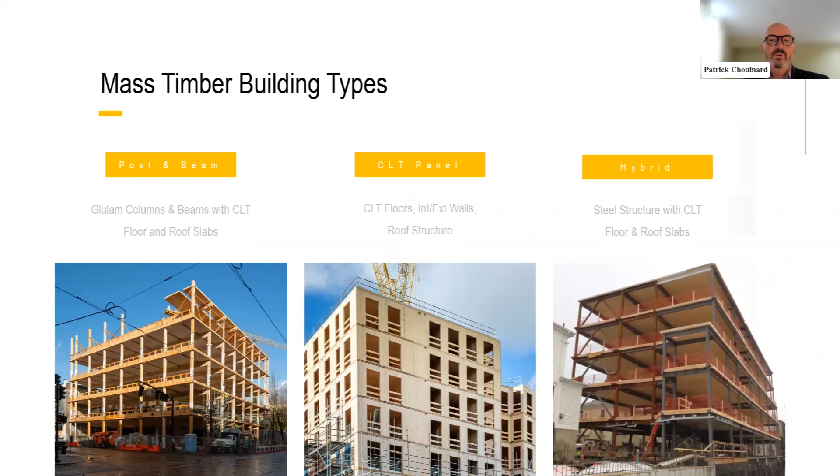Mass timber elements are varied, and there are a number of elements available in the marketplace today. CLT stands for cross-laminated timber panels. These are massive wooden panels. In our case, we make one that's 11.5 feet wide, 53 feet in length, and about 15 inches in thickness.

They are considered an environmentally friendly alternative to concrete, and they're structural panels. Then there's glulam, which is used for columns and beams.

Followed by NLT, which is nailed laminated timber panels. These are panels made up of dimensional materials, 2x4s, 6, 8, 10, and 12s that are nailed together to create panels. Then there's DLT, which is doweled laminated timber, the same as NLT, but instead of nails, they use dowels to fasten the dimensional materials together.

Then there's MPP, which is mass plywood panels. This is plywood panels on steroids—the same as plywood, except much thicker and much larger.

Then there's clips, which stands for cross-laminated insulated panels. These are prefabricated panels that come from the factory, and they're used to quickly enclose the outside of a building.

Then there are box panels, which are CLT panels essentially, but hollow on the inside. They allow us to span greater distances than a typical solid CLT panel, but cost effectively against concrete and steel.

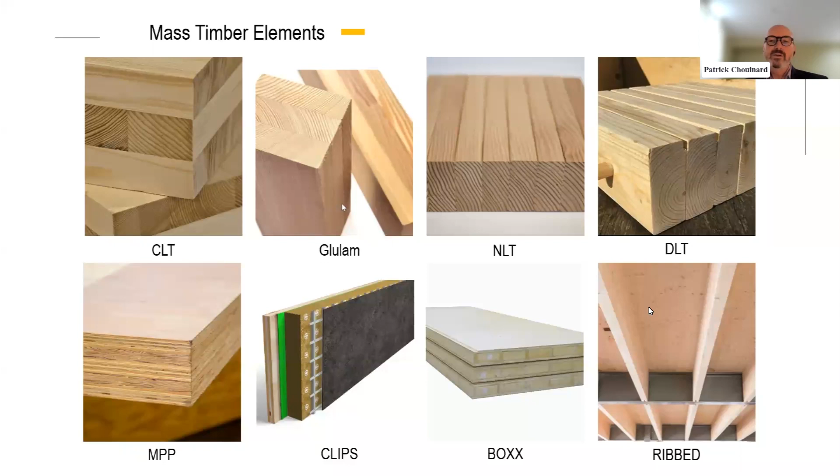And then we have rib panels, which are just like a box panel, except there's CLT on the upper surface, exposing the joists below.

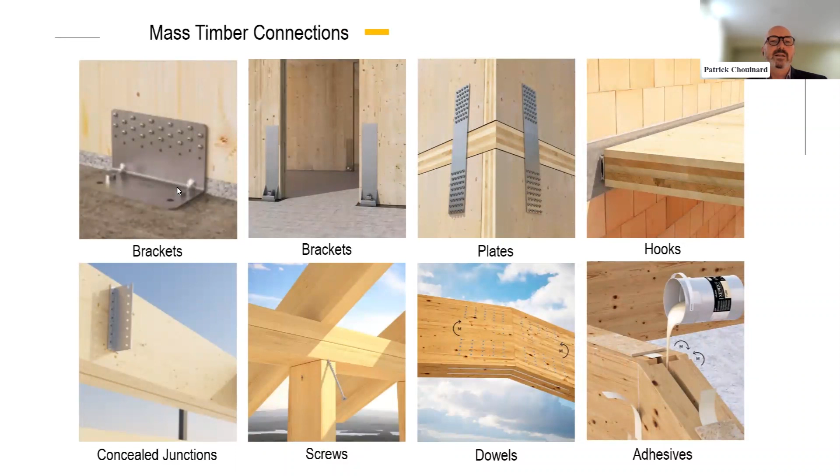The connections in mass timber buildings are really quite simple. It's made up of engineered brackets, plates, hooks, concealed junctions, screws, dowels, and adhesives. So the buildings go together very quickly.

Mass timber in Ontario: we're in the midst of a revolution in the construction industry that began in Europe about 35 years ago, landed on the shores of British Columbia, and now has made its way across Canada as well as into the United States.

It's characterized by buildings that are being prefabricated in high-tech manufacturing facilities and shipped to site where they are assembled rather than constructed in the traditional sense.

Mass timber is happening in Ontario in a big way, and this is a selection of some of the larger projects that are currently under construction, recently completed, or currently under construction in Ontario.

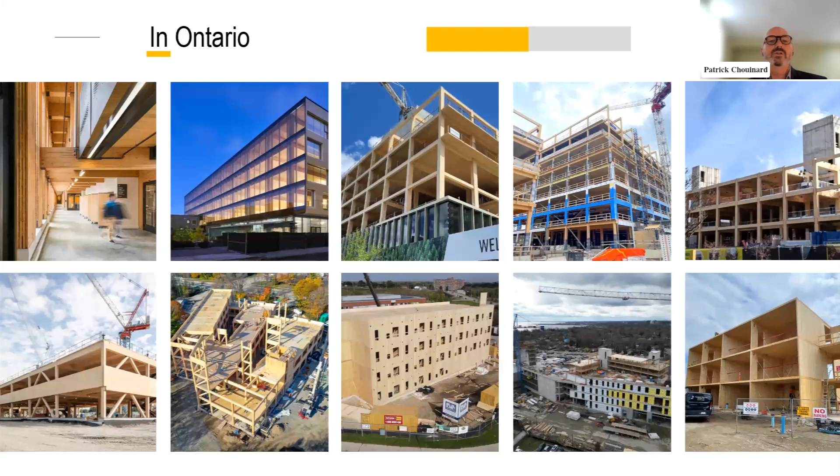Element 5 was founded in 2015, and we've done approximately 80 projects to date. I've listed all of these here just to give you a sense of where mass timber is used, in what industry sector and in what building typology.

So we have a fire hall here, top left-hand corner. This is a 3-story hybrid office building, a steel building using NLT roof panels. The next one is an extension to a library at Wilfrid Laurier University. The next one is an Aboriginal healthcare center in London. Then we have a boaters pavilion in Orillia. Bottom left-hand corner, an office building in Quebec.

We've done quite a number of single-family homes and cottages, and then everything from there up to the next project, which is our largest project: an 80,000 square foot office building for the Toronto and Region Conservation Authority.

Recently we've been doing quite a lot in affordable housing. The first one, second from the right on the bottom, is an affordable housing project for the YWCA in Kitchener, which Matt will talk about. The next one is a bit of a hybrid - also affordable housing. It uses CLT for the floor slab, but light wood frame interior and exterior walls. Lots of new projects we were under contract to supply in 2023 and beyond.

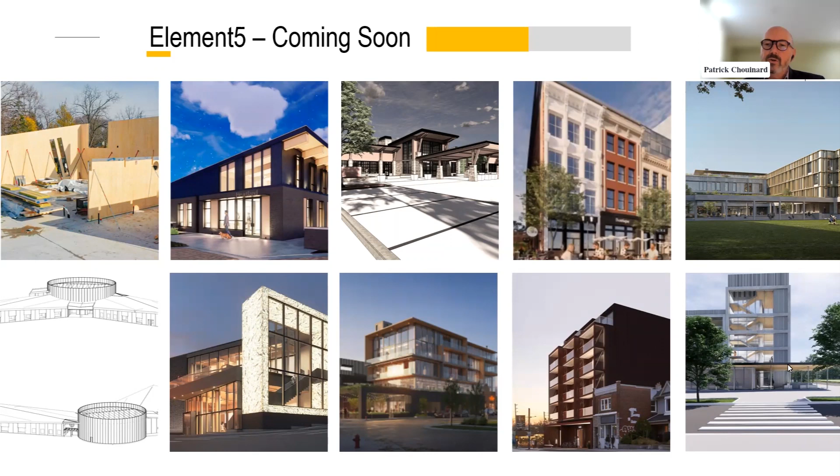Here we have, top left-hand corner, a daycare center in St. Thomas. This is a veterinarian clinic in Michigan. The next one is a golf club house, also in Michigan. We have a mixed-use building in Hamilton, a student residence for the University of Toronto. Then we have an Aboriginal school in Northern Ontario, a photo museum in Cincinnati, two more mid-rise multi-use residential buildings, and the last one here is we just got a contract for this little portico on the outside of a university building in the United States.

So why mass timber? The building you see here is called Ascent. It's the tallest mass timber structure in the world, in Milwaukee - a 25-story building. It has 17 stories of post and beam with CLT floor slabs above 8 stories of concrete.

This little graphic I've taken right off the developer's website shows the reasons why they used mass timber and the result of actually building this way. The first reason is it's a renewable resource. In this case, there was 90% less traffic on the job site, it required 75% fewer on-site workers, and it was built in 25% less time.

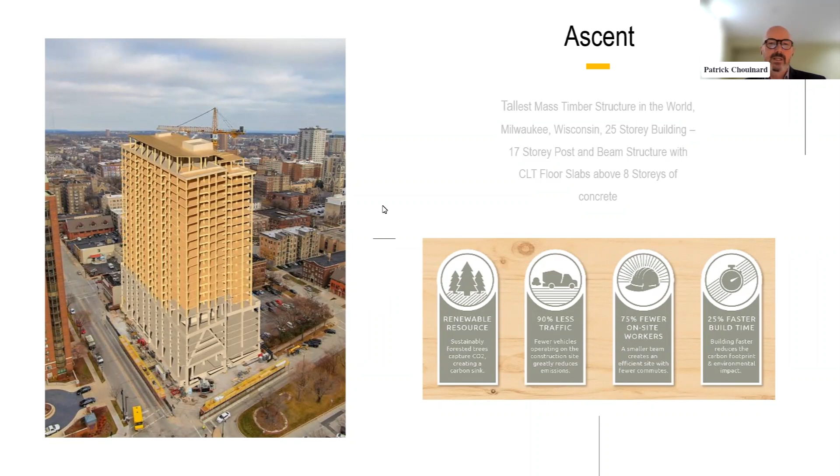From the environmental perspective, there's a major push to build in mass timber for environmental reasons. The concrete and steel industries are responsible for somewhere between 12 and 14% of the carbon dioxide in the world today. World population is growing from 7 to 9 billion over the next 35 years, and we know we cannot continue to build the way we've been building for the last 100 years. When building with wood, we're leveraging our forest's natural ability to absorb carbon - finding a systematic way of not only removing carbon dioxide from the atmosphere, but storing it in the form of these beautiful buildings.

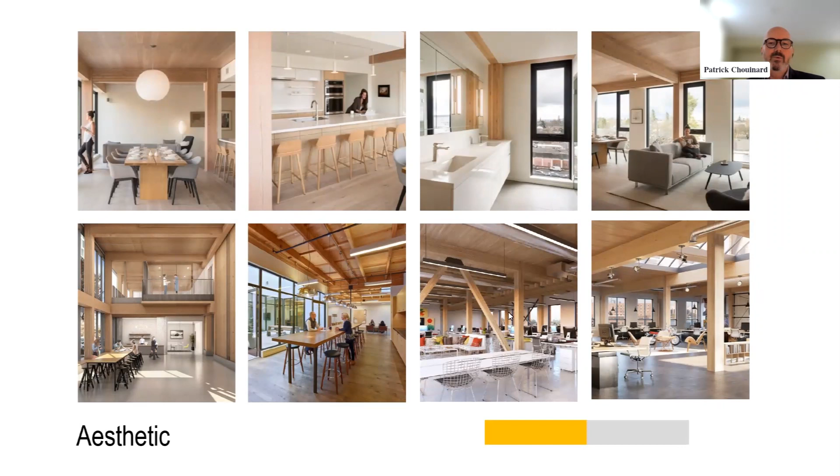There's also an incentive to use mass timber for the aesthetic. Many of these buildings are considered quite lovely on the inside. The upper row are the interior of residential spaces, the bottom row are the interior of commercial spaces. And then there are the health and wellness benefits. Many biophilic research studies have shown there are health benefits associated with living, working, and educating our children in environments where occupants are exposed to natural elements. As humans, we are just naturally connected to these types of spaces.

We were asked to address the issues around mass timber, and the first question that always comes up is how much it costs, so I thought I'd address that right away. A number of studies have been done looking at cost comparisons between mass timber, steel, and concrete. This is one particular study completed in July 2021 that looked not only at the cost differences between mass timber, steel, and concrete, but also at the global warming potential - essentially the impact on the environment.

I say this is true of pretty much every study. The results are always about the same. Essentially what they're saying is mass timber costs the same as concrete and steel, but if you can build in wood for the same price with less negative impact on the environment, why not build in mass timber?

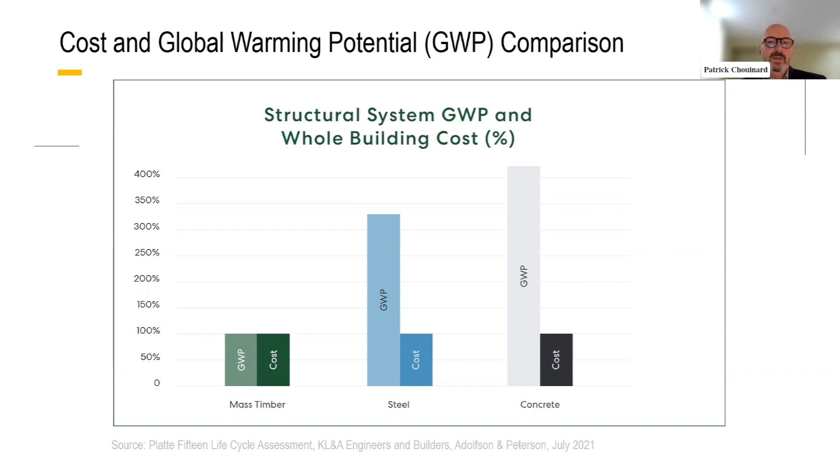So with that, I'm going to turn it over to Matt Boland, with whom Element 5 has worked on quite a number of projects together. So, Matt.

Thanks, Patrick. Yeah, very grateful to be here. Not so grateful about the birthday shout out, but I guess I'll carry on.

This, picking up where Patrick left off, mass timber for myself professionally has been an interest of mine for about 20 years. I was aware of it 15 years after the European invention or proliferation over there, definitely on my radar. And specifically, Edge Architects and our group for the last 7 years have been really in tune and focused on mass timber and how we can design with it and actually get it executed on built construction projects.

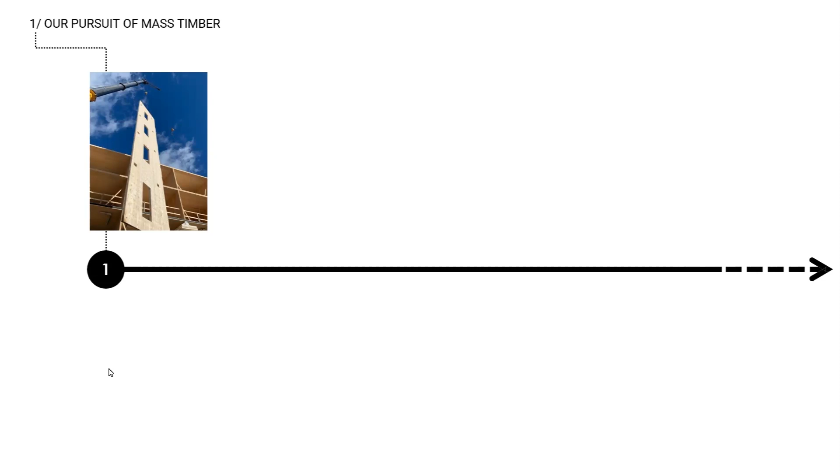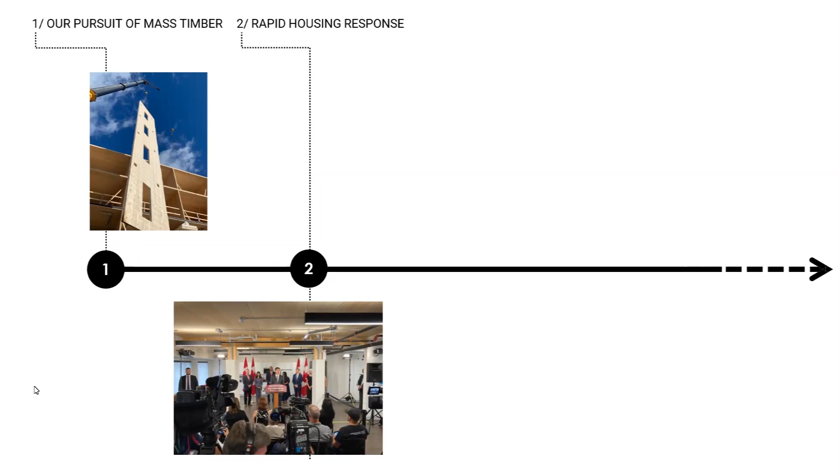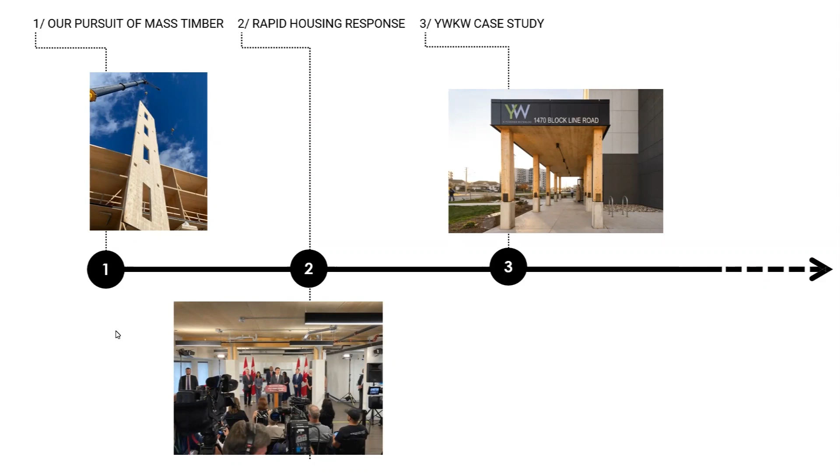So today, in a quick way, I want to go through our firm's pursuit of executing mass timber. Next, I want to talk about a rapid housing response. I know this group has more of an ICI focus, but understanding the marketplace right now and the dramatic need for housing, that's what's pushing a lot of the construction industry generally. That's what we're seeing, even though our work covers a pretty broad range across all different sectors - housing and a rapid housing response ended up being our ticket to realizing mass timber. Next, I'll go to that first project that was part of that rapid housing response, the affordable housing project for YWCA that Patrick mentioned. And finally, I'll talk about some future directions for us and the industry as we see it.

So what I want to start with is keying in on some projects where we made our attempt to incorporate mass timber, where we thought we had a client group and an overall building team interested in the innovation and in trying to analyze and assess what could best meet the needs of the project. These represent 3 projects in our firm's history and portfolio, and I'm just going to cover these relatively quickly.

Sorry Patrick, can we go back one? The first was a mid-rise infill building. As a lot of us know, with that missing middle typology, understanding the most efficient way to build it is really challenging. So we went through that exercise - mass timber was one of the final candidates we chose as our structure, but ultimately due to market and supply back in 2017, we weren't quite there in terms of the client's comfort, and ended up getting pricing on a hybrid Hambro style concrete and steel system that worked.

The next project, the glove box, started out on a smaller site, and we had this idea for reinterpreting brick and beam office in a contemporary way using mass timber, with all the efficiencies of Class A office demands that we had. Instead, the project scale and scope grew, which was ultimately a good thing, incorporating a heritage building. Given the gymnastics needed and the appropriateness of using mass timber with the reinforcement that had to be done on the existing heritage structure, it just made more sense to go cast in place at that time on that project.

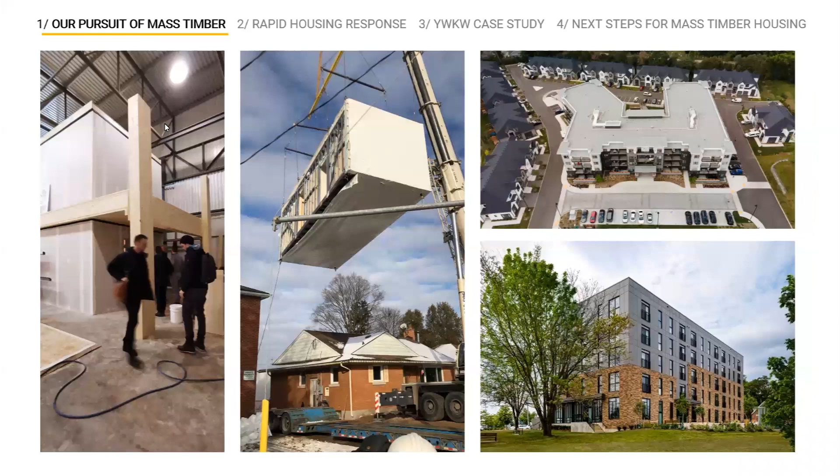Before the next slide—a lot of that work and collaboration we did, studies in not just conventional models, as you can see on the right side, for multi-res development, but our work in the modular, volumetric modular, and then the work I just discussed on the wooden office building project, ultimately led us to the YWCA, or the local branch, YWKW Transitional Housing.

This project was based on the Rapid Housing Funding Initiative, which had a very, very tight timeline and also required some degree of modular construction, what they defined as modular construction. Although that means different things to different folks, it was ultimately defined through the program as having some level of offsite prefabrication that was assembled on site.

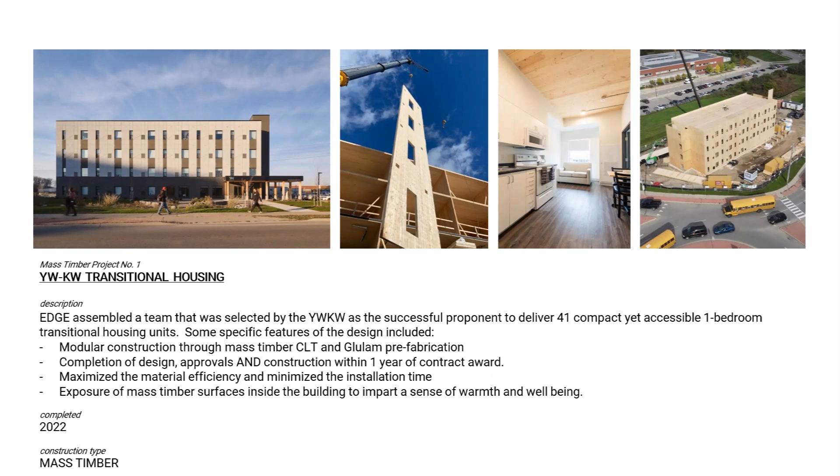So obviously that worked for us on this project. In addition to the modular requirement, the specific timing around round 1 of the funding was actually a 12-month window for completion, from the time of contract sign to actual occupancy—which for most of us, and I'm sure there's a lot of eye-rolling on this call, especially with the knowledge base here in terms of the ability to get through approvals, through design, through tendering, through construction...

...that was a pretty monumental ask at the time. But through a very specific design-build response, where we brought all of our trades, all of our consultants into the fold, and we were also ready for it a little bit early because we knew of the program and some of its objectives, we were actually able to do this successfully on phase 1.

As I'm going to get to in some of our next steps and future directions, we've actually been able to utilize that same approach, that same team, and mass timber as our primary structural resource on rounds 2 and round 3 of the funding—round 3, which is active and currently on our plates right now.

When it comes to the fast track process and more importantly, the team, this is just a quick diagram that I want to walk through in terms of the CMHC and that RHI funding, which you can see up in the top right corner. Knowing that was going to be coming down, and knowing that we had that network of folks who were interested and tracking it, we ended up with Element 5, and on the back of the relationship we had on our wooden office building project, we started conversations about how we could come up with a solution.

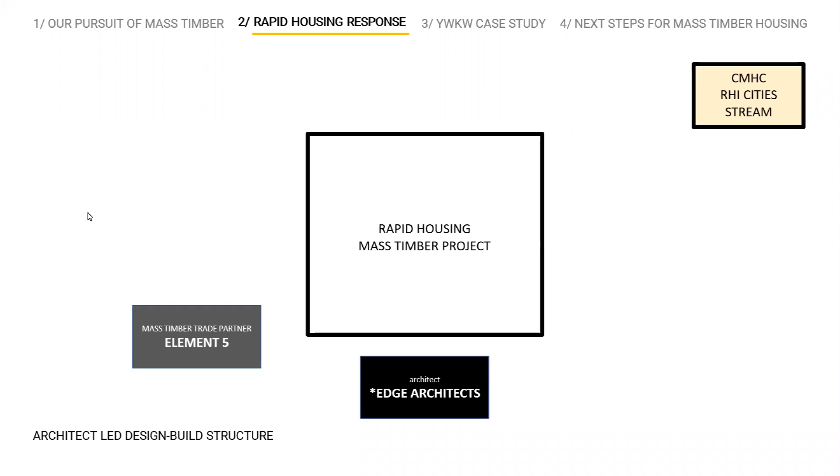A solution that would be suitable to the needs of these types of users—non-for-profits, supportive and affordable housing providers—and that would be efficient. And what kind of team would that look like? So from there, we ended up putting together that team.

As you can see, specifically on the right-hand side here, the trades and consultants were so critical to getting involved early, and then also ultimately the general contractor who we really needed. We as architects and holders of a certificate of practice cannot be constructors, so we knew that with the conventional CCDC 14 that a lot of these groups were going to be relying on for that turnkey approach and fast track approach for the clients, we would need a solid and reputable contractor to take that on and work closely with.

So we had worked on a number of projects with YWKW, and they became a really great partner along with ourselves, Element 5, and the rest of our trades and consultants to work that through.

Another key part of this is, as you can see here, the CMHC funding came through our two-tiered form of government, municipal government in Region Waterloo. That funding came directly to the region, and then the region actually administered that funding to YW.

And on top of that, we had the city of Kitchener on the left, who actually offered up the land, which was underutilized vacant land, city-owned.

So that in and of itself created a collaboration and an aligned motivation for everyone in the team, even at the approvals phase of the project, that really paid a lot of dividends in terms of that fast tracking process.

And then, as is often the case, we also had a construction advisor, a consultant, client rep in WalterFedy, who was another local reputable multidisciplinary firm, who was again essentially part of the team and part of that collaborative effort that we worked on.

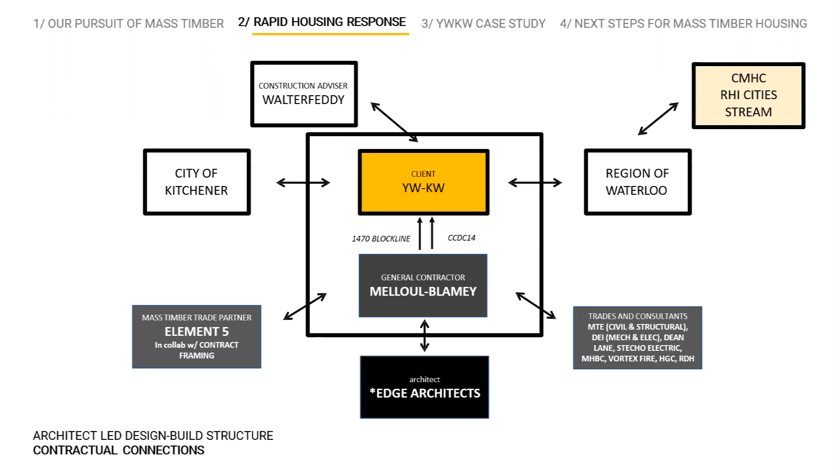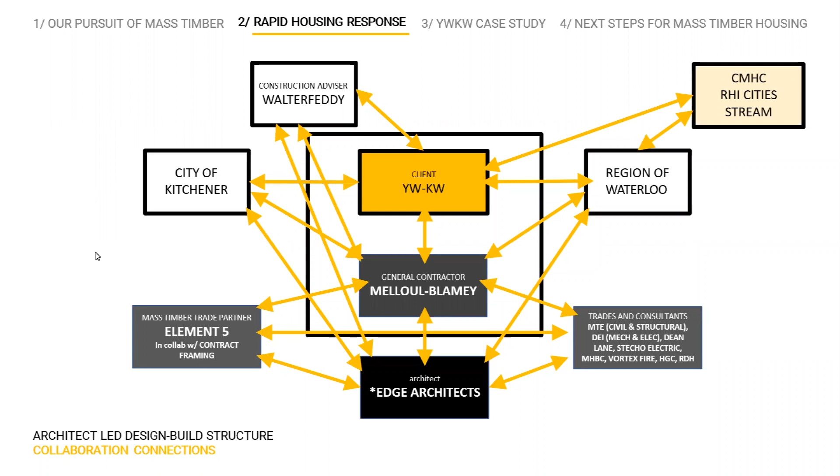So as you can see, the degree of collaboration and communication required through the project was extensive and ultimately led to a lot of our success.

Here is something we created in the early stages of the project that just, again, was going to put that focus on what are the different stages and what are the different targets that we need to map out here and have everybody on the team understand.

So obviously first was working through that planning and approvals process. In this case, utilizing the mass timber, it was actually something that we needed to integrate not just the planning department, but actually the building department too, and getting their comfort.

And in doing so, what we ended up doing is pulling on Vortex as our fire and building code consultant. We were able to not just utilize their knowledge and their understanding, but again, their network of other projects.

So although this was one of the first multi-res fully mass timber projects constructed in the province and in the country that we're aware of, in this type of fast track approach specifically, there was some other projects, one particular in Toronto that Vortex had also worked for.

So there was already a basis of understanding with the Toronto Building Department and an alternative solution that was provided to them. And we were able to connect with them, start to open up that dialogue and exchange of information. In fact, not just between us and our consultant and our design and client teams, but we were actually able to connect the actual building departments and the chief building officials to start to foster that. And that's something that really helped us through that stage as well.

And we've continued to utilize that in other jurisdictions, making those connections.

Outside of that, you can see from our site approach and foundation design, it was very much based on a simplistic approach, as most of us know. If you start to get into very complicated underground parking structures and various things like that, you can really suck up a lot of the time of a project underground before you even get above. And so that was a bit of a challenge in terms of making sure the design was very efficient and streamlined from that standpoint.

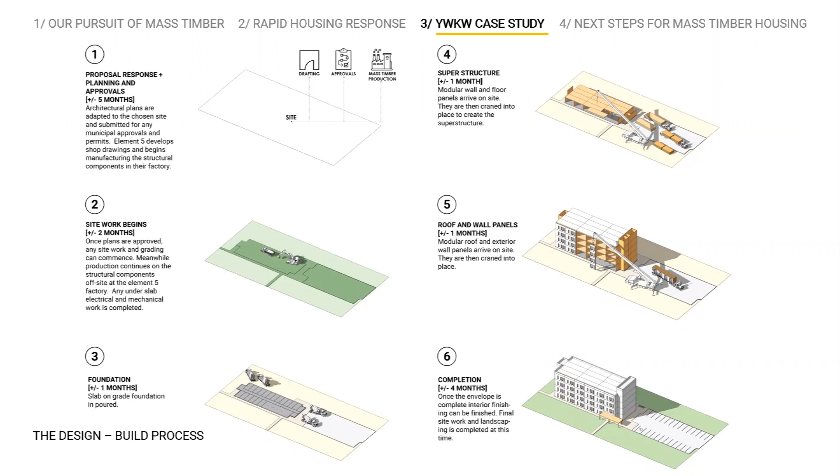So I do want to show when it comes to that, particularly the superstructure and how that worked. And I think we do have a time lapse here of the building going up. So Patrick, I'm not sure if you want to flick that on or if that's going to work for us here.

So is that playing on your screen, Matt? Not yet. If not, we can probably follow up with the link.

So it's not happening. We can skip that, Matt. Okay, sure. Yeah, just to keep it going.

That was no question a key part of the process. But another part, as Patrick spoke to briefly, was cost—that was a big factor. It was in fact one of the reasons we decided to work with Melloul-Blamey, given their understanding and knowledge of conventional forms of construction, where other non-combustible systems would have been used, particularly something like a precast or total precast building design, which would have met the same intent as prefabrication and modular in the definition.

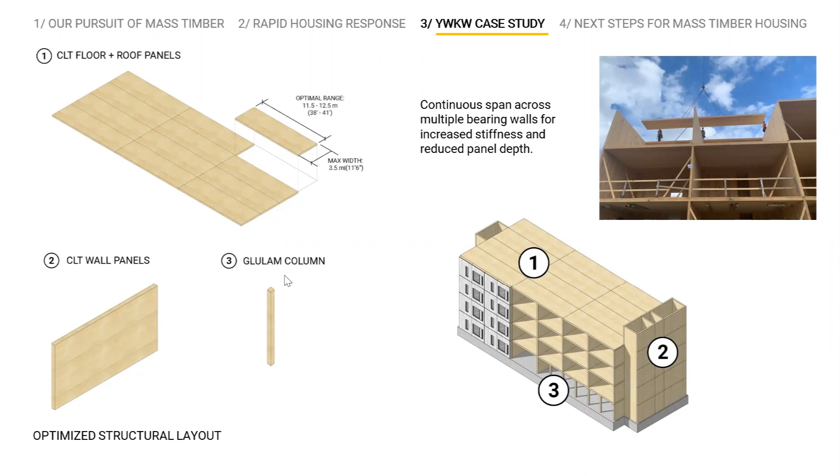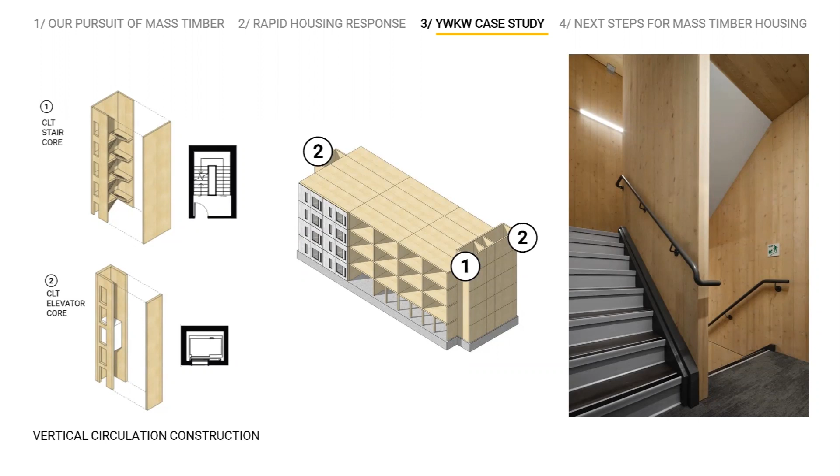So we knew from a speed and efficiency standpoint we were going to pick up a lot of efficiencies there. Same too on a 4-story building design—the max length of the panels, about 16 meters, allowed us to turn them the other way and run them full length for our elevator and stairwell cores, while still meeting all the building code definitions, really trying to wrench up that optimization and efficiency.

One other thing from a design standpoint that really helped us was we had a site that was quite narrow, and as we'll see in one of the pictures later, it had these sharp points that made it challenging to lay out a typical conventional building slab.

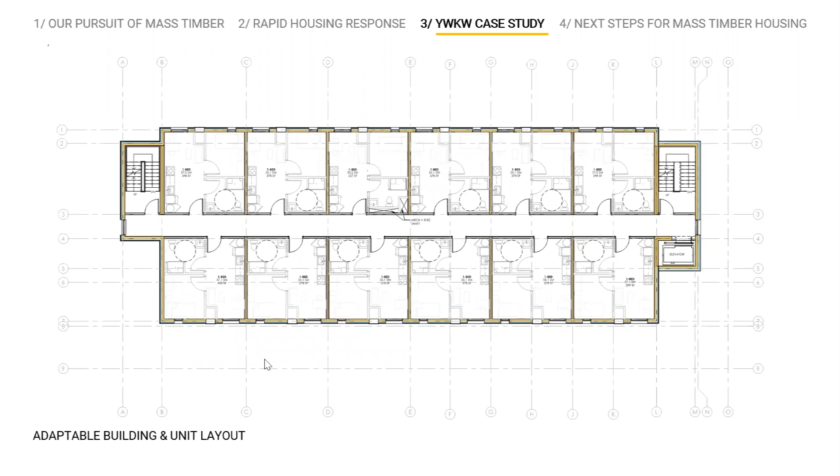Typically in our multi-residential and conventional work, we'd always start with an 18-meter minimum width tower slab residential building footprint. But in this case there were 2 factors: one, the site design meant that if we could narrow the building form, we'd better utilize the site; on top of that, we had a client requirement specifically wanting small 400 square foot or less units, 350 to 400 square feet. By narrowing the building, we accommodated that programmatic need, kept the building area down, and still provided the important 1-bedroom units they were looking for.

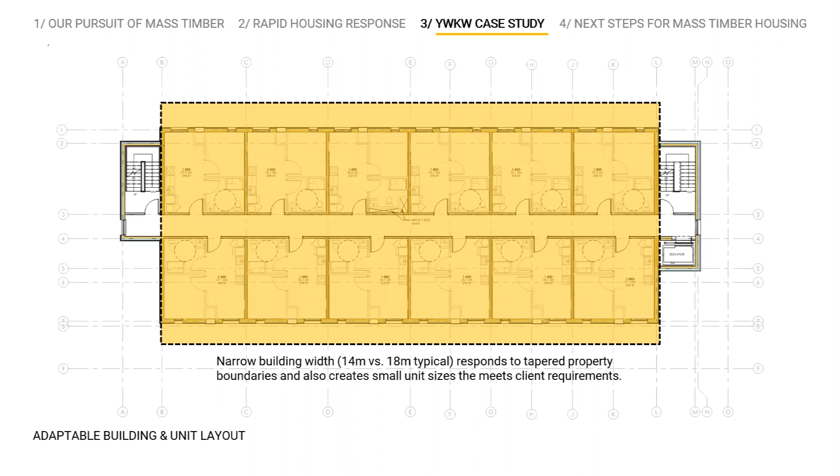On those 1-bedroom units—because this specific project was tailored towards women battling homelessness—it was a rewarding experience for all of us involved, knowing the users of this building. As is the case in many municipalities and jurisdictions dealing with encampments and homelessness, we were taking people, specifically women in vulnerable situations, and they were moving into these units.

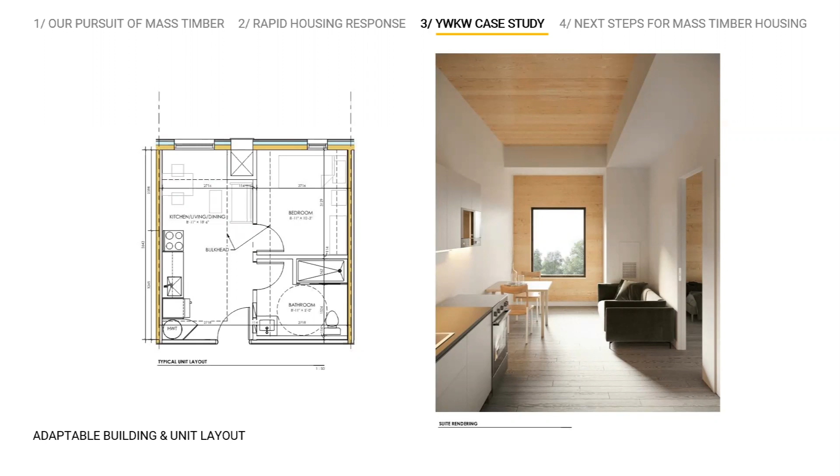As you can see from our layout, with that narrowed building footprint we were still able to create a bedroom with a closable door. That was actually important in terms of trauma and dealing with those sorts of things—that specific unit amenity was really important. In addition, we were still able to accommodate barrier-free accessibility in our washrooms and movement through the kitchens as well. So a lot of those things were important programmatically for us.

When it comes to mass timber, a big question is fire. We had a great fire and code consultant on the project. The good thing, from this standpoint, is there's a wealth of testing data that's available and understood and accepted. Even recent changes to both the national and Ontario building codes are incorporating CLT and mass timber referencing more prolifically. So I think that was just a matter of documenting.

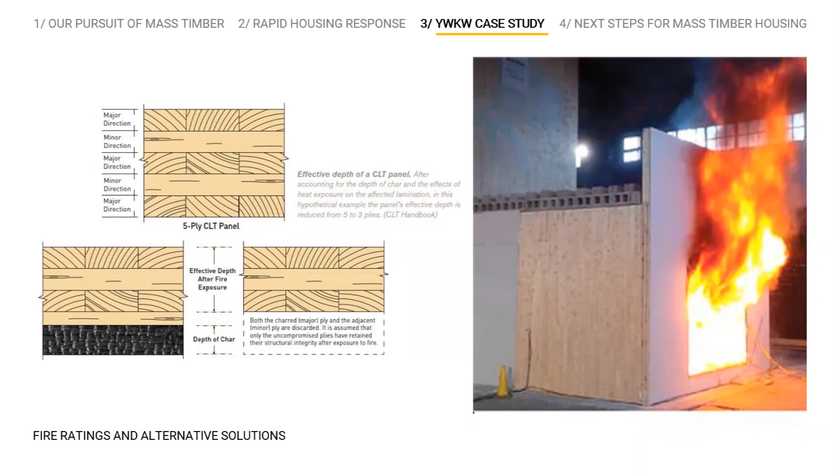There were some alternative solutions at the time of this project where we had to make sure referencing, understanding of the testing and certification standards for structure, delamination, fire performance, all of those things were properly understood, and there was a proper level of comfort with the building department, and we were able to do that.

Next though was the acoustics. This was one that particularly, as there was a change to the building code from requiring STC ratings to ASTC ratings, that was a challenge we had to face. Unlike the fire issue, where there's a wealth of data, it's more just a matter of pointing the building departments to that data.

For the acoustics, there isn't a lot of data specifically around assemblies where exposure of the mass timber product is had. With that change in the designation of sound and acoustic performance, instead of just being able to cut through a wall and say that's my assembly and it meets, in this case we actually had to show that the entire room would perform. Our goal was to expose as much of the surface of the product as we could to instill that sense of warmth and well-being and some of the biophilic advantages that come along with the product, and it was really important to us to do that.

So with our acoustical consultant, we had to get creative and frankly quite conservative in how we designed each unit to limit the spread of acoustic sound from one unit to the other. The way we did that was to essentially checkerboard our unit finishes plan, where you'd either get an exposed ceiling or an exposed wall. That allowed us to cut off sound vertically and horizontally across the transition of units, in a way that ultimately met the satisfaction of our acoustical consultant, who then provided our sign off with the city.

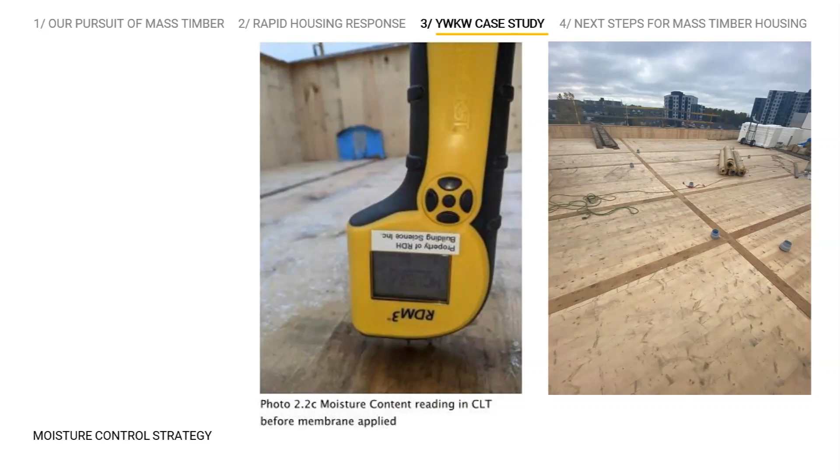There were some areas in the photo here where you can see the plywood splines that connect. That was an area that did cause some challenges throughout the construction, to the extent that in some cases, before we put roofing down in certain areas, we had to replace those plywood splines because, as we know, plywood really sops up water and it's very difficult to get it out. So that's informed our process on subsequent projects, where we've made sure that as those plywood strips are going down, they're getting taped and sealed in a way that doesn't allow for that sort of water ingress over time.

So finally, when it came to our envelope, there were different strategies on how we could approach this. There was a thought early on with this clip system that Element 5 had come up with, that could be a prefabricated, fully offsite assembled wall system installed on site. Ultimately we ended up not going with that, and we just had the actual exterior panels clipped on, and then did a site-applied thickened EIFS application with 6-inch insulation. This was again very efficient in limiting the number of trades on site, so we were able to execute it very quickly and cost effectively.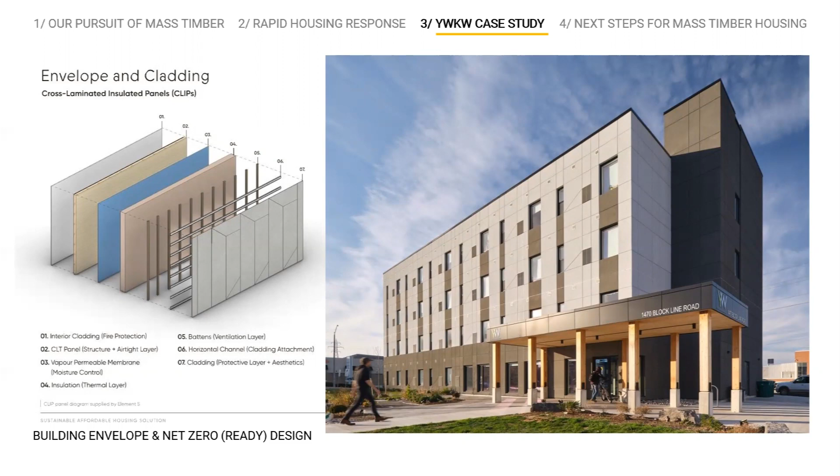Moving forward, in our climate, I wouldn't say EIFS is always necessarily our preferred choice, but in this case, through some of the resilient low and high traffic coatings we were able to put on, and through working with our envelope consultant and with Dryvit and their team, it ultimately was a very successful application and very high performing through the lack of thermal bridging and so on.

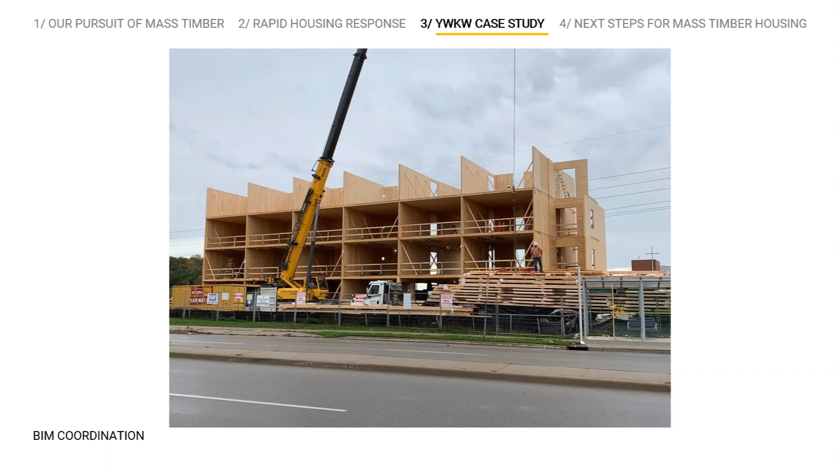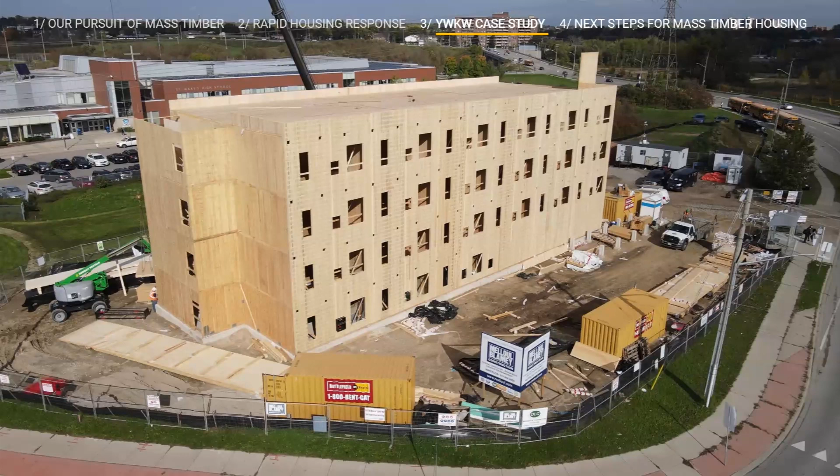I'm just going to flick through some of the pictures here over the next couple of minutes. You can see we did have the canopy where we exposed that product to create some warmth. The entrance columns themselves are Douglas fir, but the CLT panel you see there is the same CLT panel we used inside, actually the exact same dimension, the optimized 5-ply. We just pulled it out and used it there. So you can see the way that helps create a sense of warmth and well-being for a building that's otherwise intended to be quite austere and not overly high-end.

As a commentary, as our experience watching these CLT and mass timber projects come to life over the last number of decades, what we understood is that a lot of what we saw was high-end or high-profile institutional projects. Although those are great and exciting, one of the things for us in trying to address the housing crisis, and also promote the more widespread use of the system and process for some of the biophilic, environmental, and efficiency benefits of the product, was that if we could showcase how it can be used in an application like this—supportive housing, affordable, mid-rise—those are all challenging areas to deliver and typically not seen as utilizing high-end products. So we realized that if we could execute it here, the ability to transition back out to either market rate housing, office, or institutional would be an easier process.

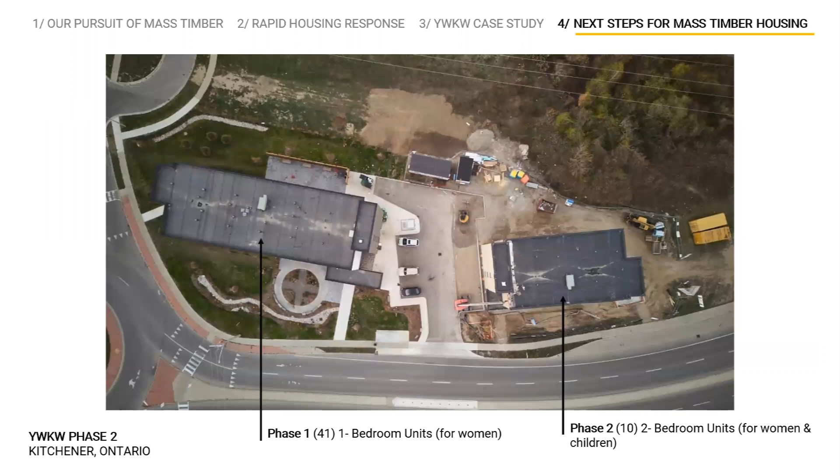Here again, you can see the overhead view of both phases of that YW project that we looked at.

Again, just a construction shot of the second phase of the project, showing that same envelope system, that thickened EIFS application we used as the appropriate solution here. We're already looking at other cladding and building science envelope solutions on other projects as we carry on.

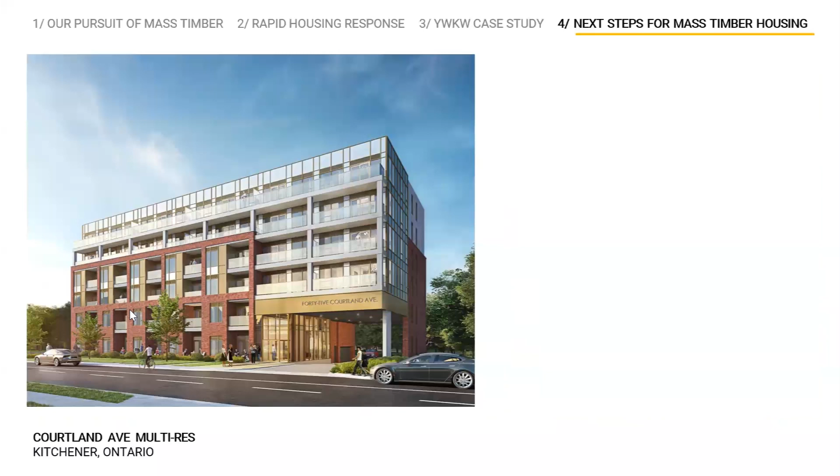We're seeing the proliferation of this system — this is a market rate project we're working on in Kitchener, which actually started down the path of a conventional approach. We consider ourselves agnostic, able to design with any structural system. This project was intended to be non-combustible, primarily utilizing precast, but through costing and market forces, feedback from our builder team and trades showed that a hybrid approach with CLT floors and stick frame walls, as Patrick talked about, was actually the best way to go. That's the way this project is now going.

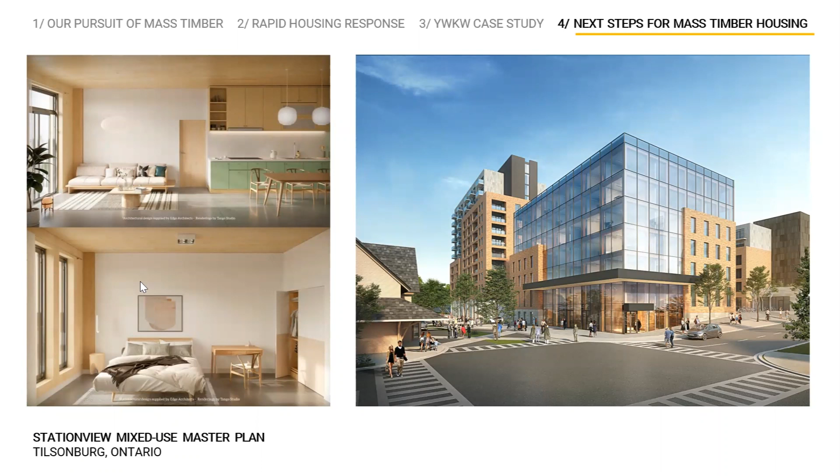So that's exciting, and this one, potentially more than any other, is really starting to showcase things. This is a really exciting project, a master planned block plan in Tilsonburg, with close adjacency to the new Element 5 facility in St. Thomas. It's a mixed use of buildings with mid-rise — you can see the high rise in the back, as well as commercial office and retail in the front. We're really able to flex our design muscles and optimize this product on a project like this in a versatile way, taking this last decade of experience and understanding, and more importantly, our network of expertise, and applying it to projects like this.

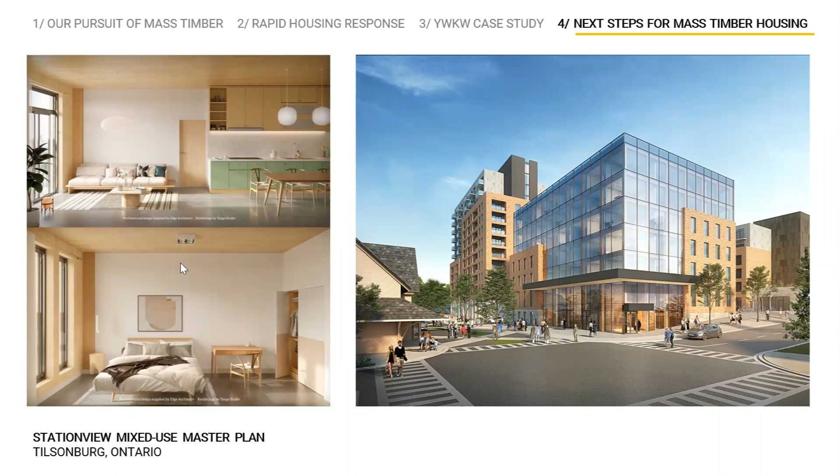It just occurred to me that executing this type of innovation in the market is very challenging. But one of the things about being here today is reinforcing the importance of collaboration — not just among design, consultants, or constructors, but everyone ultimately responsible for the execution of the project, right up to the approvals authorities. That is so important.

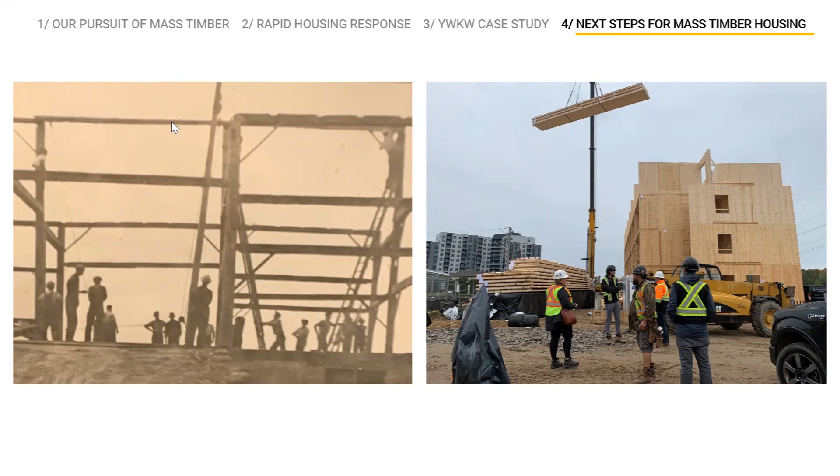Great, thank you, Matt. So, challenges and opportunity. There are definitely challenges in the mass timber industry. There's the perception that wood burns, that it's not strong and that it won't last. There isn't a lot of experience in the industry. There aren't a lot of architects or engineers who know how to design and engineer buildings this way. There's not a lot of education in the marketplace. Human nature is we're resistant to change, we're risk averse. There's a lack of information.

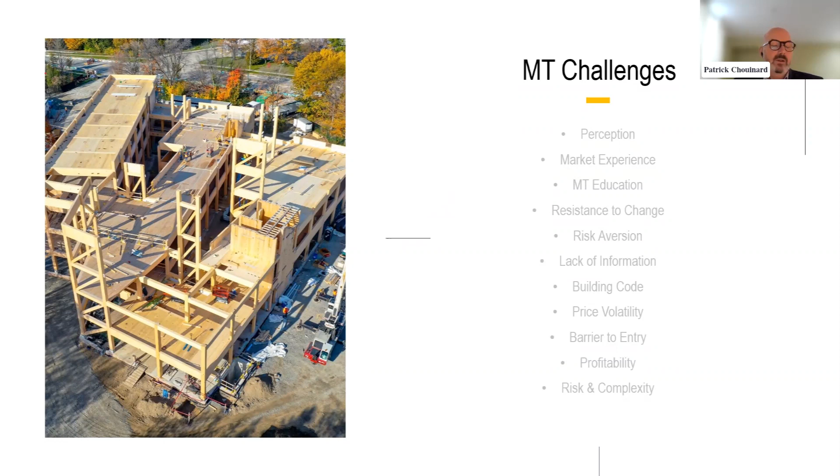There are some challenges with building code, but Ontario has actually come a long way. We haven't mentioned it, but we can go up to a 12-story encapsulated mass timber building in Ontario at the moment. There has been some price volatility in the lumber industry over the last year, but at the moment lumber prices are sort of rock bottom, which is great. There are barriers to entry for manufacturers to get into this industry because it's a significant investment to get a plant up and running. Profitability is quite slim, the margins aren't high at the moment, and also it's a risky and complex industry.

But I think the construction industry is also facing many challenges, maybe even more so than the mass timber industry. For years there have been thinning margins, labor shortages, abysmal productivity. You mix that with the challenge to house and provide infrastructure for a growing population, which is largely going to happen in urban centers, in the midst of an environmental crisis that's exacerbated by the way we build today. So we need to change the way we're building in order to have less impact on the environment.

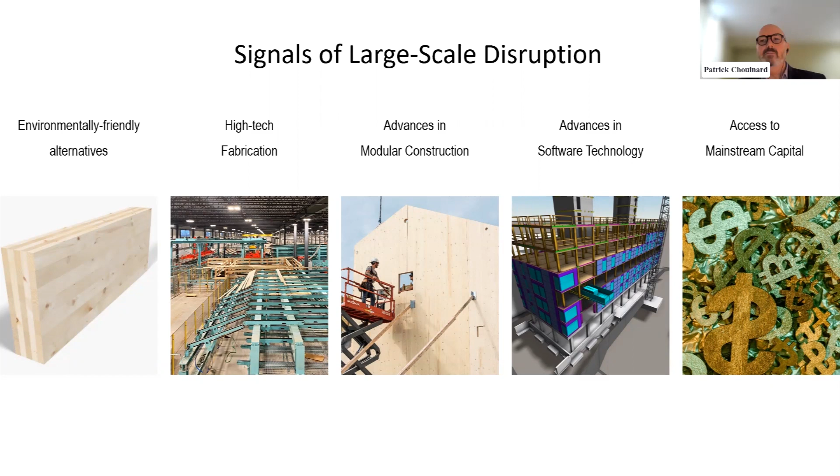There are signals of large-scale disruption happening in the industry at the moment. We're seeing the introduction of environmentally friendly alternatives to concrete and steel. We're seeing more mass timber manufacturers coming into the marketplace. There are advances in modular construction, advances in software technology, so 3D modeling and BIM technology, and then a lot more access to mainstream capital.

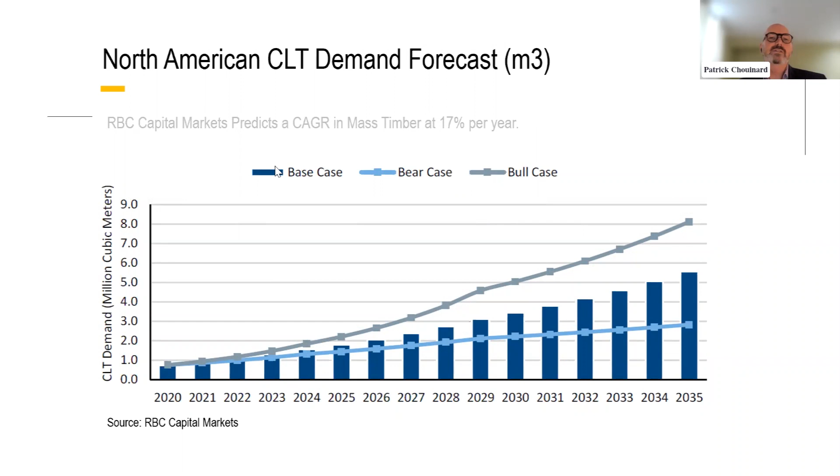RBC Capital Markets predicts that there is a compound annual growth rate in mass timber of about 17% per year. Based on our experience, we're seeing that growth rate is significantly higher than that, so we think that's quite conservative. There's a growing number of resources that are available in the marketplace.

There is one major mass timber manufacturer in Ontario at the moment, which is Element 5. But many of the larger buildings that I showed you at the beginning of the presentation were supplied by mass timber manufacturers either outside of Ontario, in other provinces, or by Europeans. So there's certainly a supply of mass timber manufacturers.

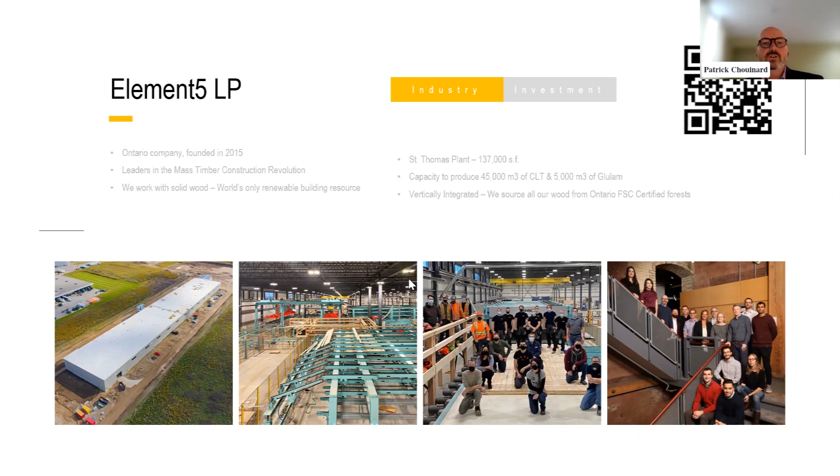Yeah, thanks. So I think I gave probably a bit of the overview of some of our work here that you can see. And again, going back, in terms of sustainability, innovation and collaboration, those are really driving forces for us. We understand why convention is the way it is in construction. We're talking about big projects, big investment for everyone involved, so trying to figure out ways to do things differently is challenging. That's where we feel we're well equipped to try to do that. Part of doing that means really understanding the conventional means and being well versed and experienced in those, which we are or feel we are. That gives us the ability to understand where the opportunities actually lie. So you don't find us always trying to push our innovative things.

We are always doing it in a way that actually makes sense, where there can be an advantage that isn't just aesthetic or isn't just environmental, because if you're looking at that through a myopic lens, it's not going to be effective in terms of execution, and that's where we ultimately want to live. So I'll leave it there.